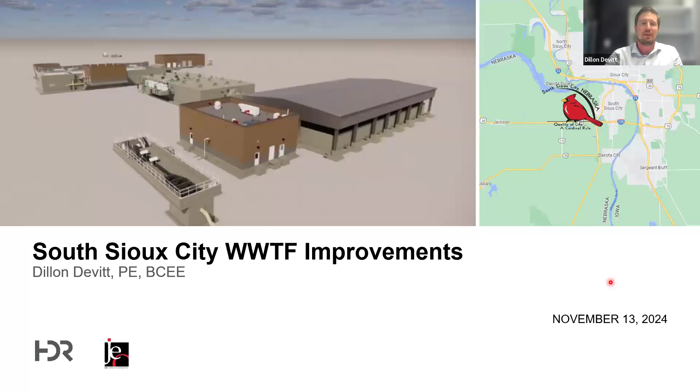So again, starting with our background of the facility, talk about why this project was needed, what we were looking for, the outcomes and the objectives, and then kind of dig into some of the details about the design and quite a bit on the challenges we had during the startup.

So starting on the background: South Sioux City, Nebraska is a town located in the northeast section of Nebraska. It's a suburb of the Sioux City metropolitan area. It is just on the south side of the Missouri River, and has a metro population of just south of 200,000 at the moment. Like Dan had mentioned, this project won a grand prize award in the industrial waste category. So keep in mind that this whole system was designed to treat, at the moment, 100% industrial waste flows. So even though it's a city project, it is an industrial treatment system.

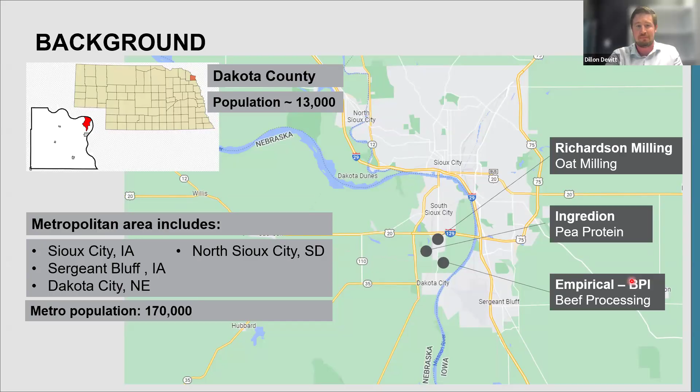About 5 years ago, the conditions of the South Sioux City wastewater treatment facility were as follows: there is an industrial district in South Sioux City that houses a handful of industries. The primary industries were BPI, a meat processor, Richardson Milling, which does oat processing, and an Ingredion facility that did pea protein.

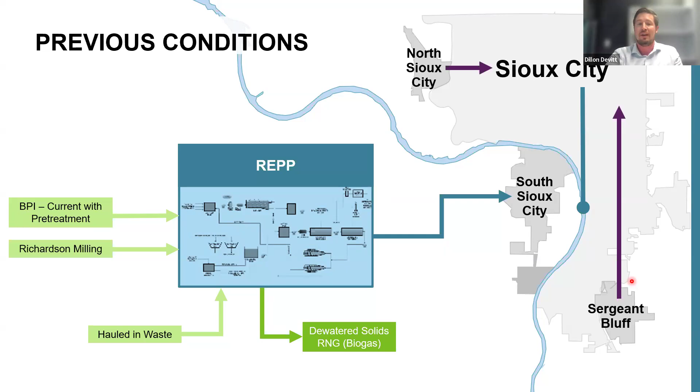There was a for-profit facility we refer to as REPP, which stands for Renewable Energy Production. They would take all the waste generated from the industries and run it through anaerobic treatment to produce biogas, which they would clean into a renewable natural gas source and inject into the city's grid. That REPP facility ended up having financial troubles and went under.

So there was a point in time where all this high strength industrial wastewater was no longer able to be pre-treated in this renewable energy plant. So all that wastewater, along with South Sioux City's domestic wastewater, would be collected in their sanitary sewer system.

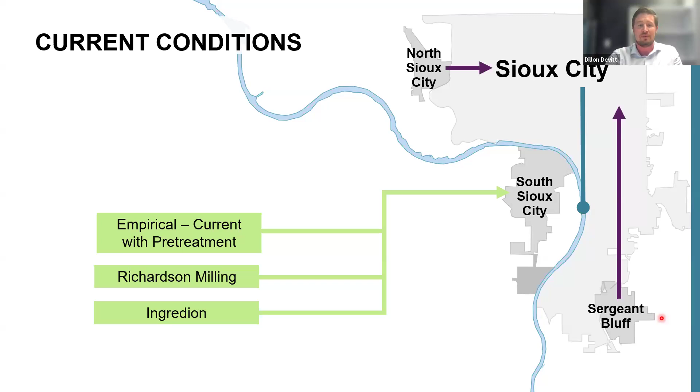They would pump it across or under the river to the Sioux City, Iowa wastewater treatment plant. That ended up causing a lot of strain without the pretreatment facility for the South Sioux City industries. So South Sioux City reached out, they had a problem, and they sent out an RFP.

We started talking to them, HDR did, and ultimately we started planning on what we could do to fix this problem.

The project needs for the RFP that we wanted to look at was, of course, that the pretreatment facility was out of operation. Because there was no pretreatment from this high industrial strength waste, Sioux City, Iowa was putting capacity restrictions on the South Sioux City wastewater coming across the river.

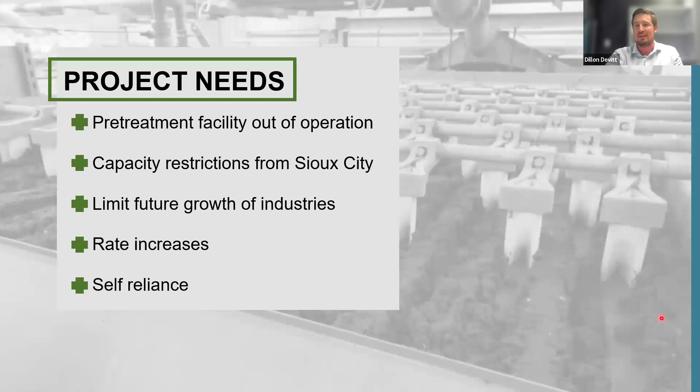Those restrictions limited any future growth of industries in the South Sioux City industrial district. And there was threats of rate increases, and ultimately the city decided they wanted to become self-reliant.

So they identified some objectives. They wanted to figure out how to develop the most cost-effective solution for the industries, to maintain the ability to grow the industrial area and maintain user rates on the industries as low as they possibly could.

They wanted to utilize the existing infrastructure. And because it was an industrial district, a big topic was that if a new industry came in, we needed to be able to expand it fairly easily. And then, of course, we wanted to be energy efficient.

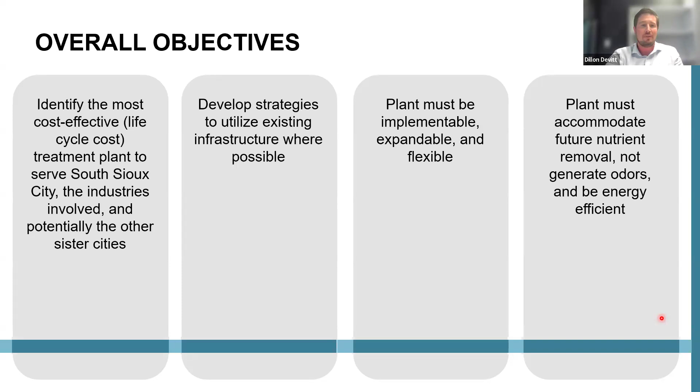We didn't want to be a nuisance to neighbors. We didn't want to generate odors. And if they were ever imposed nutrient limits, we wanted to be able to handle that. So we jumped into doing a feasibility study.

A little bit of information about the wastewater flow being treated at the South Sioux City wastewater treatment plant right now: we treat around 2.3 million gallons per day at a max month, around 2.

For those who have a feel for BOD in wastewater, typical domestic strength BOD, the stuff that comes out of city sewers, is around 300 milligrams per liter. BOD is a measure of how much carbon is in the wastewater. Our wastewater was more than 10 times that, so it's very high strength wastewater.

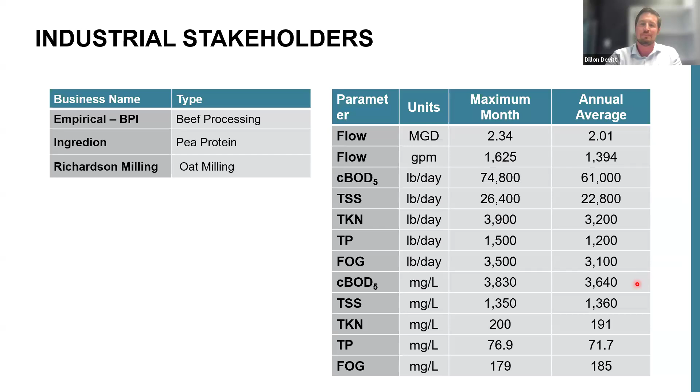Knowing that, we set out and did a feasibility study and looked at a handful of alternatives. We ended up boiling those alternatives down to three main alternatives that we compared more rigorously.

We had conventional activated sludge, aerobic granular sludge, and we also compared it against membrane bioreactors. In every alternative we looked at, anaerobic pre-treatment was a must because of the strength of the wastewater. At the end of the feasibility study, the most cost-effective option monetarily was the aerobic granular sludge.

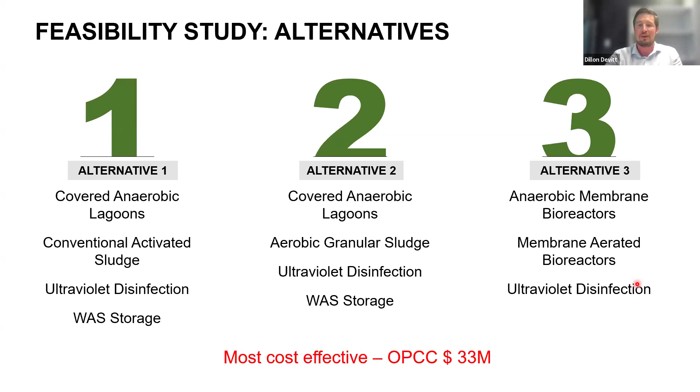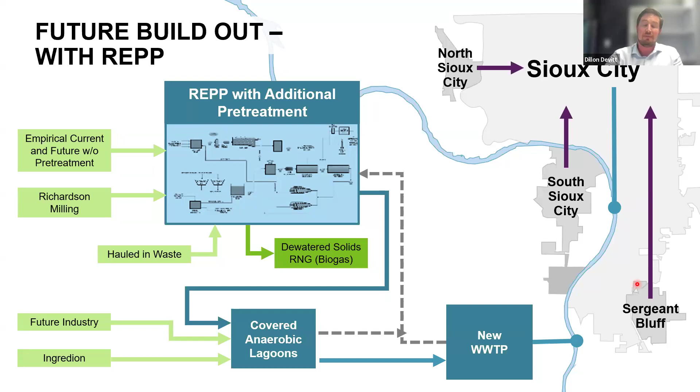A couple of things we were looking at for the flexibility needs of this system: we needed to plan for the ability for the REPP pretreatment facility to come back online. So we needed to see what would happen to the plant if our wastewater strength decreased. We also needed to plan for that never coming back online.

So why we ended up with our anaerobic treatment process of lagoons is that it gave us the flexibility of treating lower strength or higher strength wastewater, with the ability for flow equalization, as these industries don't operate 24/7. Many of these industries operate 5 days a week, sometimes 6 days a week.

So there are days where no flow comes to the plant from the industries. Those covered anaerobic lagoons were able to still have flow coming out of them to sustain the secondary biological process when no flow was coming in for a period of 2 to 3 days.

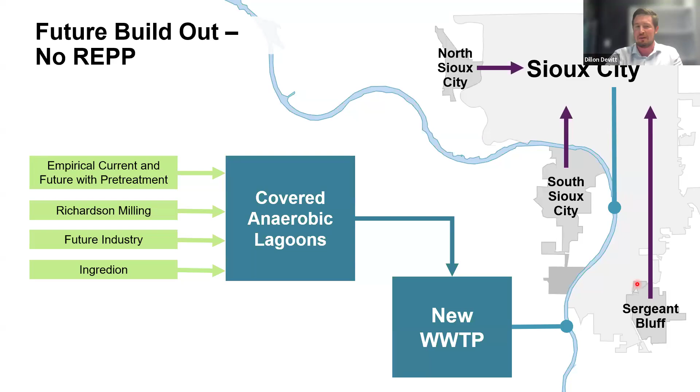We ended up picking AGS, aerobic granular sludge, for this facility. I'll be saying AGS for most of this presentation. It was a new greenfield plant, so the city had to buy land, and the AGS system has a very small footprint, which was very appealing. Because of that small footprint and its mechanical aspects, it had lower life cycle costs and was more energy efficient. The anaerobic lagoons provided flow and load equalization upstream, which helps by limiting typical peak flows and maximum instantaneous flow rates seen in domestic systems without equalization.

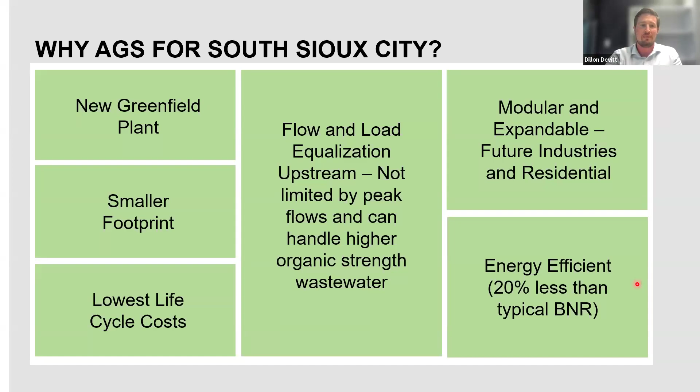So real quick, I want to take a step back from the project itself and do a little dive into the AGS overview.

AGS, or aerobic granular sludge, is a fairly new wastewater treatment system for the industry. It's classified as an intensified activated sludge, meaning you're getting more bacteria or biomass in the same volume of a treatment system. The AGS system accomplishes that by growing aerobic granules, which have a couple of benefits. You can fit more of them in the same volume compared to a conventional sludge system, and they can grow 2 to 5 millimeters in diameter, looking like little peas, and they settle very fast.

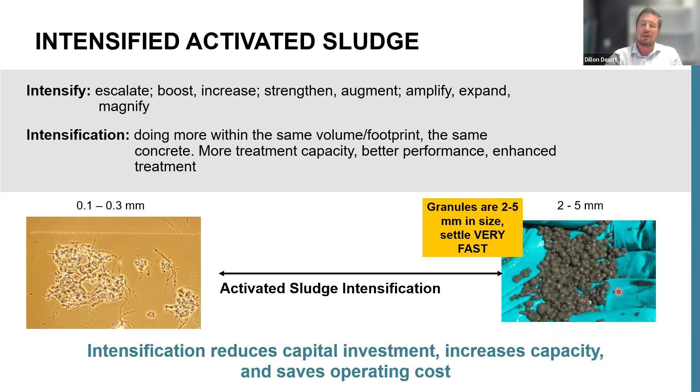A big part of wastewater treatment is separating solids from liquid, and with aerobic granules that's much easier. You have an outer zone that's aerobic, an inner subsection that's anoxic, and a center zone that's anaerobic. That biological population basically replaces the need for those separate tanks. Here's a good video with an overview of it.

The theory behind the aerobic granules is that they are layered. In a conventional activated sludge system, we have separate zones of aerobic, anoxic, and anaerobic systems, each treating a different constituent in the wastewater. With aerobic granular sludge, those zones are all within each granule. As you can see in that animation, the spheres have layers with anaerobic in the middle, anoxic in the subsection, and aerobic around the outside. They settle very fast, as you can tell from that picture in the corner of the screen.

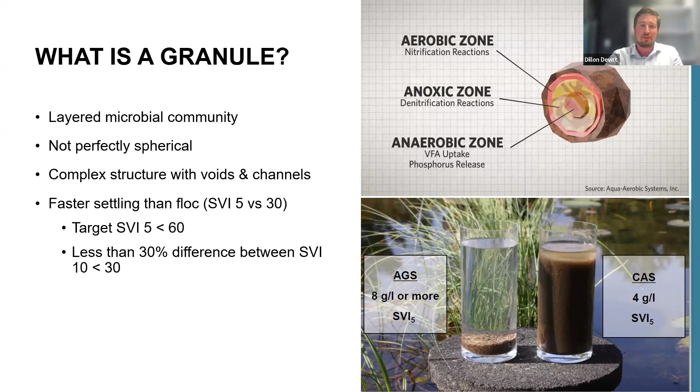So how do we form the granules? With the AGS system, we have two primary methods: hydraulic selection and biological selection. Having a system that selects for PAOs, which happens during anaerobic fill cycles, helps grow EPS, an extracellular polymer that helps bind the granules together. Once we grow them, we keep them in the tank by settling them to the bottom and wasting the lighter floc from further up.

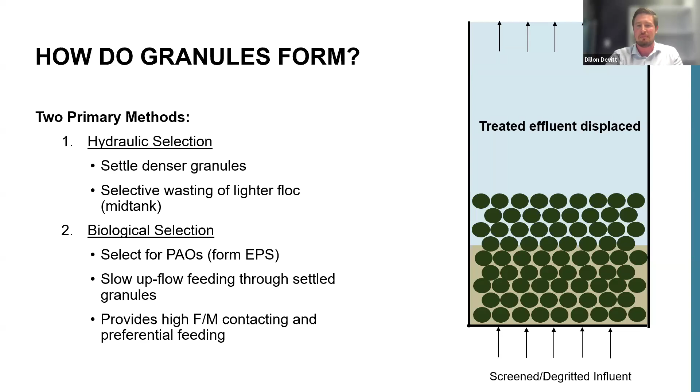The system works similar to a sequencing batch reactor, or SBR, so it goes in cycles: it fills, it aerates, it settles, and it wastes.

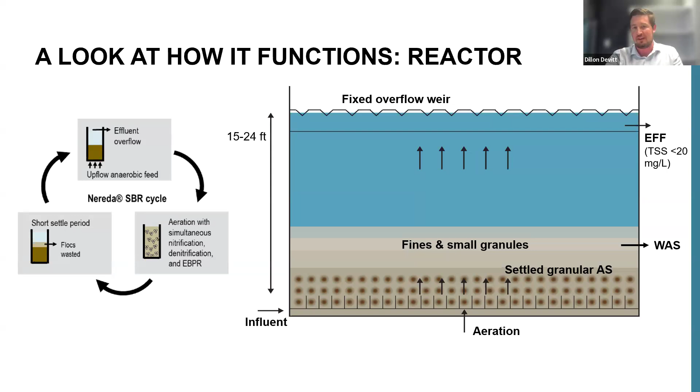So I wanted to jump into a little bit of the design of the plant, getting back to the storyline of the South Sioux City system. Once we finished the feasibility study and selected a treatment technology, we worked with the state of Nebraska and determined effluent limits. This plant discharges into the Missouri River, so we had fairly less stringent effluent requirements than you see in some places. We had a 25 milligram per liter BOD effluent target, a 30 milligram per liter suspended solids target, and some fairly high ammonia targets, even though we had very high ammonia coming into the plant.

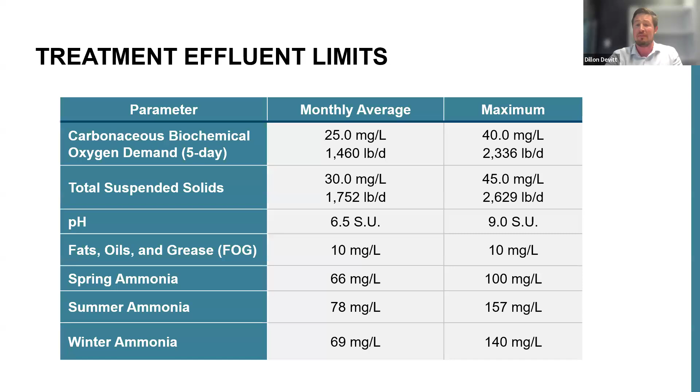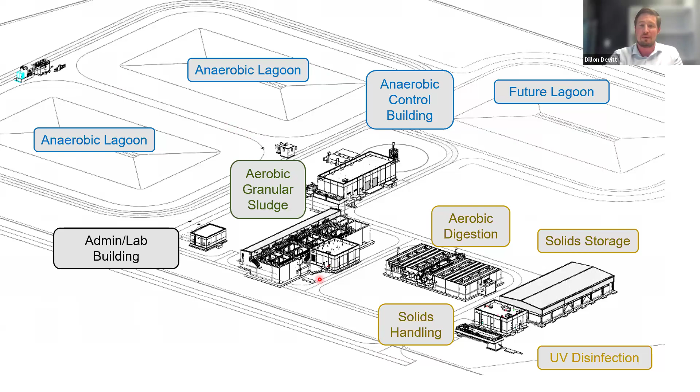We went through a design process over about 1.5 years and ended up with a site layout like this. Starting in the top corner, we had our anaerobic lagoons, which allowed for the first anaerobic pre-treatment of the high-strength wastewater along with flow equalization for the entire downstream process. That pre-treated wastewater would go into our aerobic granular sludge system and ultimately out to UV disinfection. We had auxiliary processes to handle biogas generated in the anaerobic lagoon system and the waste activated solids generated in the aerobic granular sludge system.

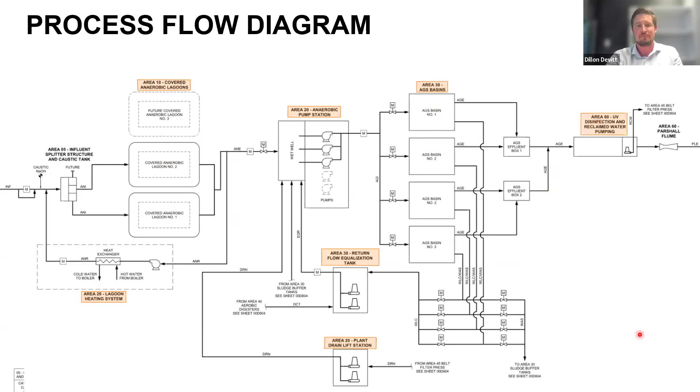During our design process, we modeled every single building constructed out on the plant, so we were able to detail out everything we wanted shown in a 3D model and render those models to show to the city, contractors, and other stakeholders.

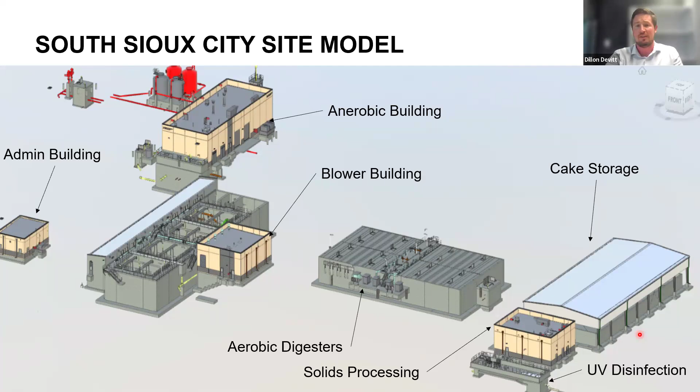Zooming into the AGS reactors in particular, we have 4 AGS reactors. These reactors operate in sequence, so one reactor is always filling at a time. There is no need to stop flow.

The reactors fill, and as one is filling, the other 3 reactors are in either a react cycle, a settle cycle, or a wasting cycle. There are effluent weirs inside the tanks, and when wastewater comes into the reactors, it pushes the clean treated water out.

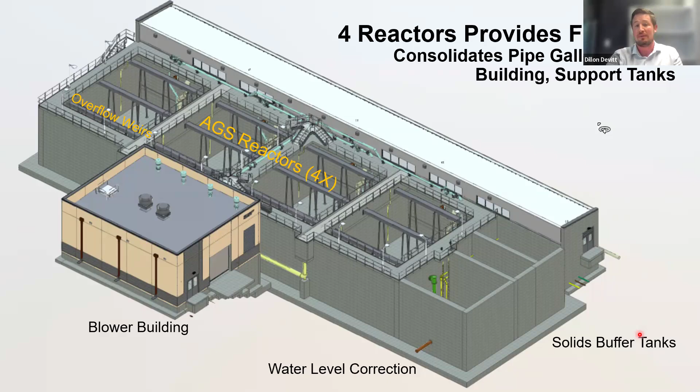So jumping over a little bit to some of the struggles we had during bidding and market - this is right in the middle of our COVID supply chain issues, so this was a huge struggle we had to overcome. We had an engineer's estimate of constructing this entire facility of around 33 million.

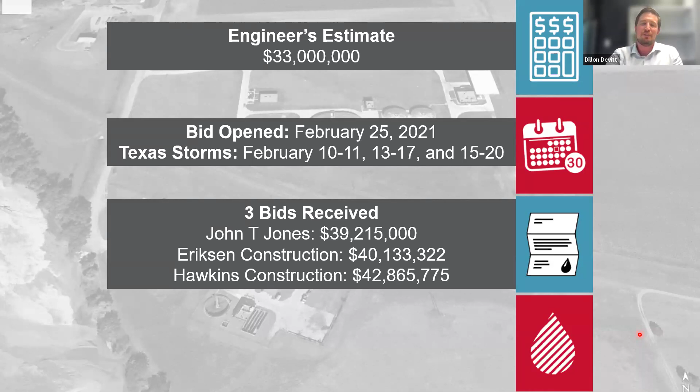And in 2021, we also had Texas storms, plus COVID supply chain issues, so we had bids come in very high. Bids opened February of 2021. We had COVID, the supply chain issues, and all suppliers had very low hold times on their quotes.

We had to go immediately to a value engineering effort to make this plant feasible for funding. We were able to remove about $1 million from the project through a VE effort. We were able to acquire some additional SRF loan money, and we talked to a contractor to get them on board with the unknowns that were going to happen in the future.

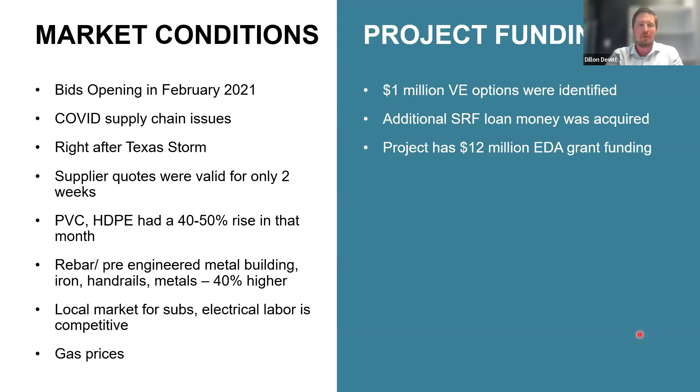It was a really, I wouldn't say difficult, but nail-biting time on whether this was going to happen or not. But thankfully, we were able to figure out a path forward.

Once we figured out a path forward, we received bids in February 2021, gave a notice of award in April, and construction commenced. We ended up completing construction in June 2023, and opened the influent valve to the plant in July 2023.

This plant has been in operation since July of last year, and we were able to go through startup. I'll talk about it here in a little bit, but there's also a bit of an expansion to the plant in the future.

So I have some photos I wanted to share of this system. I like this photo because it kind of shows the size comparison - we have 25 million gallons of anaerobic lagoon capacity.

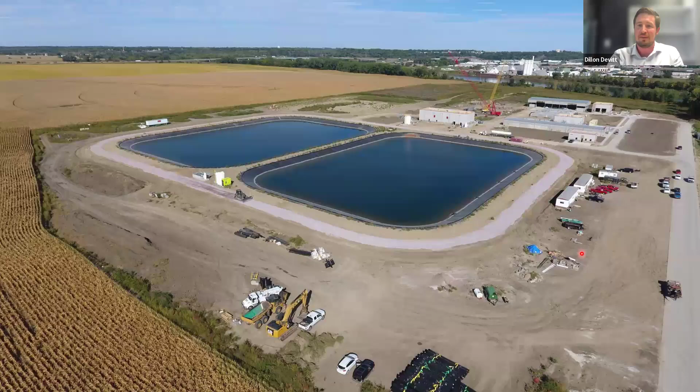This photo is right before the covers were put on the lagoon, so they are full of groundwater for leak testing. Flying over to the north side of the plant, you can see the lagoons here, showing the size comparison between anaerobic lagoons versus the AGS system.

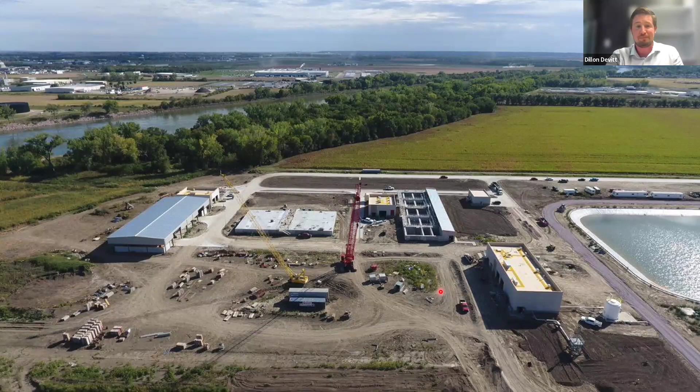The AGS system is much more compact and much smaller, obviously. Just another photo from the other angle.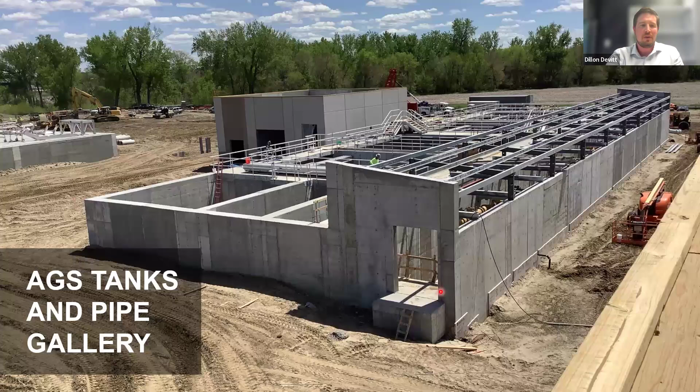The AGS system in construction - we have the 4 tanks, and then there is an auxiliary pipe gallery off to the side of the tanks that holds all the piping that sends wastewater to and from each one of the tanks.

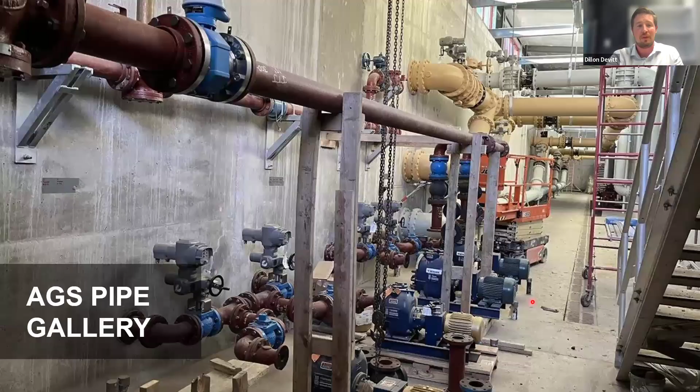Inside that pipe gallery, there is quite a bit of piping that goes back and forth. We were able to size it fairly decently to allow access for maintenance of all valves, equipment, and so on.

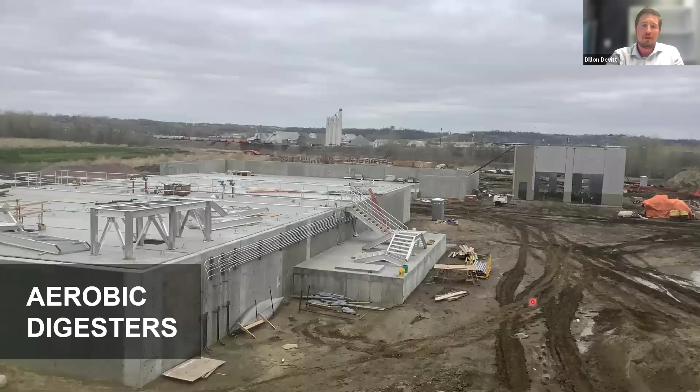We were able to put aerobic digesters in to the south of the plant. These aerobic digesters treat our biosolids generated in the AGS plant, targeting a Class B biosolids. The city ultimately dewaters their treated biosolids, stores them in a storage pad until the months of the year when they're able to land apply them.

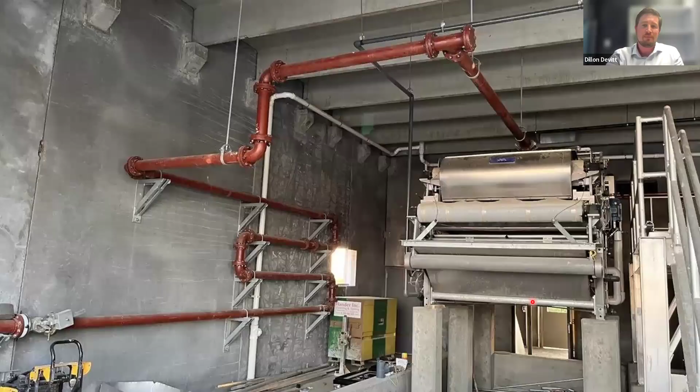Dewatering with a belt filter press - just a construction photo of it.

Construction was complete around May of 2023, and we started planning to start up the facility. I want to talk about the startup challenges we had during that time.

We were able to start the facility up in June 2023. We seeded the lagoons and the AGS seeding from an anaerobic system across the river from Sioux City, Iowa. We took some of their waste solids, brought them over, and put them in our anaerobic system. We had a neighboring aerobic industrial facility that gave us their waste activated solids, which we used to seed the aerobic granular sludge system. Once we had seeded everything within about a 2-week period, we opened the influent valve and started pumping raw wastewater into the facility on June 12th, 2023.

If you remember from that photo I showed earlier, those lagoons were full of groundwater - we had filled them up to leak test the liner. Once we started sending raw wastewater into them, it took a while to turn that over. We get about 2 million gallons a day of raw wastewater, and we had 25 million gallons of groundwater inside that anaerobic system that just had to flush out. Around mid-August, that anaerobic system was able to generate biogas.

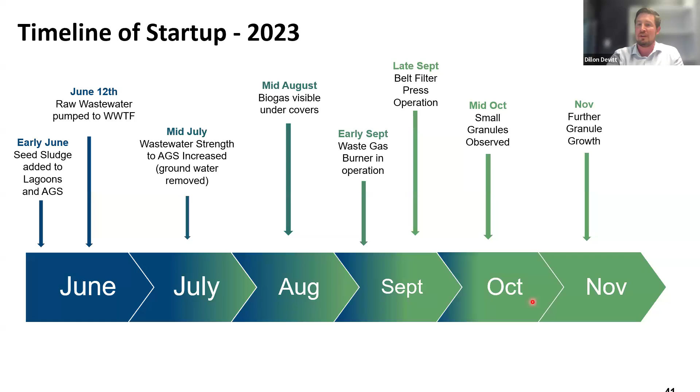Based on that timeline, the first thing we did was seed our lagoons. We had a very large volume anaerobic system, and we seeded about 20,000 gallons of sludge - not even 1% of the volume. It was almost an inoculant to kickstart the process, as opposed to fully maintaining a whole biomass in the system. We just had trucks come over filled with that seed sludge, and they ran back and forth for about a week seeding the plant.

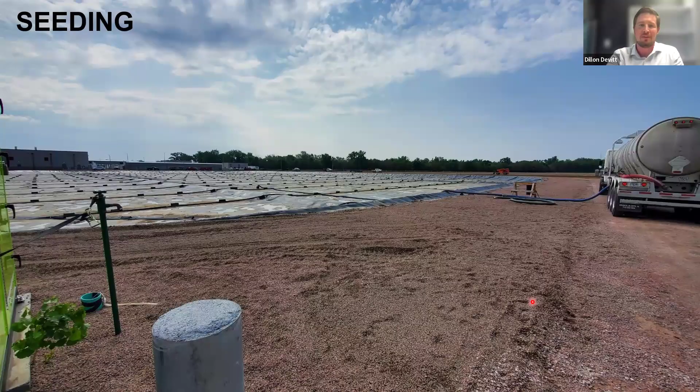Once we opened up the raw wastewater valve, we started to monitor the operation of the system. The covered anaerobic lagoons run very similar to any other anaerobic process, other than the solids concentration inside them. We monitor alkalinity values, volatile acids production, pH, BOD, and COD removals.

One topic that was important during design and became much more important during startup was sulfates. We wanted to monitor the sulfates because the anaerobic system produces biogas that we were ultimately planning to burn in boilers to heat the process, and burning biogas with hydrogen sulfide in it is detrimental to equipment.

Quaternary ammonium compounds are an inhibitory compound that inhibits biological growth in different types of anaerobic bacteria, so we wanted to monitor that too. We did measure some, but it didn't impact the process.

The AGS system was monitored very similar to any other aerobic system, with the caveat of the batch style. So we monitored CODs, mixed liquors, TKNs, ammonias, and worked with Aqua Aerobics, who was the supplier, on settle time and cycle structure.

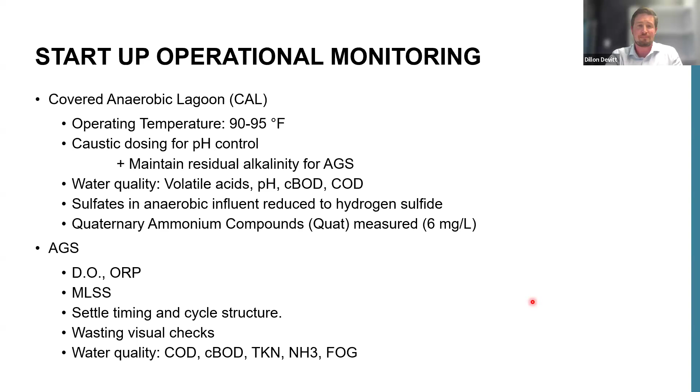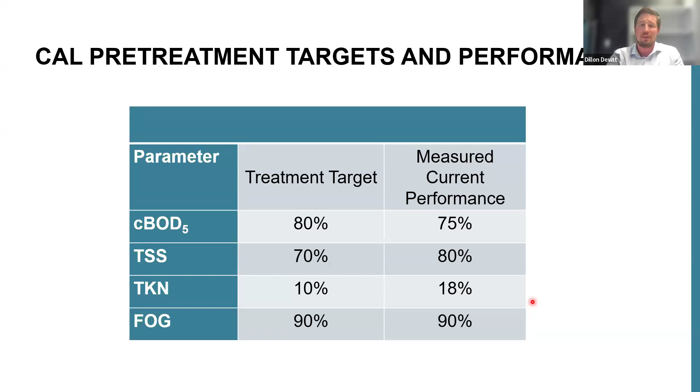During startup, the first process to start up was the covered anaerobic lagoons. We had treatment targets of 80% BOD removal, 70% TSS, 10% TKN, and 90% fats, oils, and greases removal. If you see the right column, we pretty much hit all of our targets for each of our main constituents.

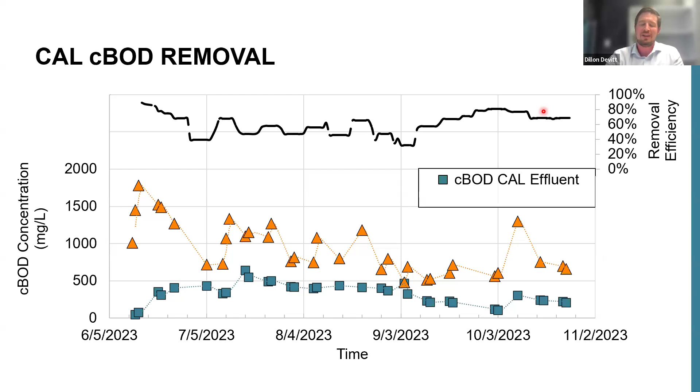That's kind of a neat graph - I think it shows a bit of a story on how fast the biomass grew. But in terms of how long it took to pass all that groundwater out of the system, I think this next one tells it a little better.

This is the ammonia readings we recorded coming out of that anaerobic system. You can tell it's a fairly nice curved line showing how long it took to almost purge the system of all the groundwater. It took about 5 months, and past this point we stay fairly steady on how much ammonia is coming out of the lagoons.

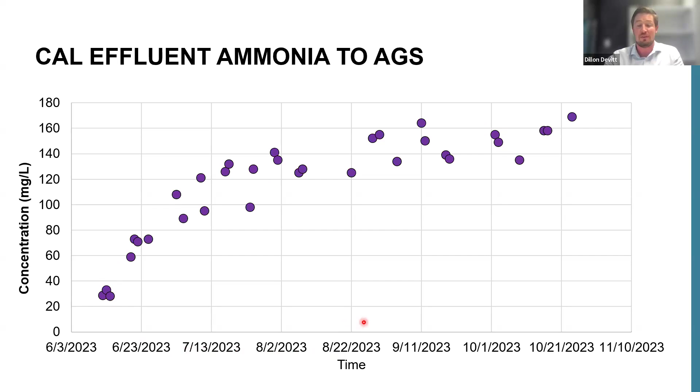So I guess I'll flip right back. So this is kind of the timeline down here of how long it took to purge the system, and that's with the water quality.

September 5th, we finally saw that the system had grown enough and was operating efficiently enough that biogas was being generated. So we started seeing biogas filling up the lagoons. The lagoons are covered anaerobic lagoons, and when the biogas is generated in the lagoon, it just collects in bags or a cover on top. As you can tell, that looks pretty ballooned up, and that underneath that cover is all biogas.

So once we saw the biogas, we started up our biogas handling system. And then I mentioned it a little bit before, but I want to dig into it a little bit more. We realized very quickly that we had a sulfur problem.

Our original design for the system had about a 460 continuously generated SCFM biogas flow rate. So we thought we were going to generate 460 SCFM. We thought we were going to have somewhere around 3,000 parts per million by volume of hydrogen sulfide in our biogas. And we had installed a proprietary activated carbon scrubbing vessel that we were planning to take the biogas, send it through the scrubbing vessel that would absorb the hydrogen sulfide. After that vessel, we were able to use that biogas for beneficial use, or at that point in time, burn it in a waste gas burner.

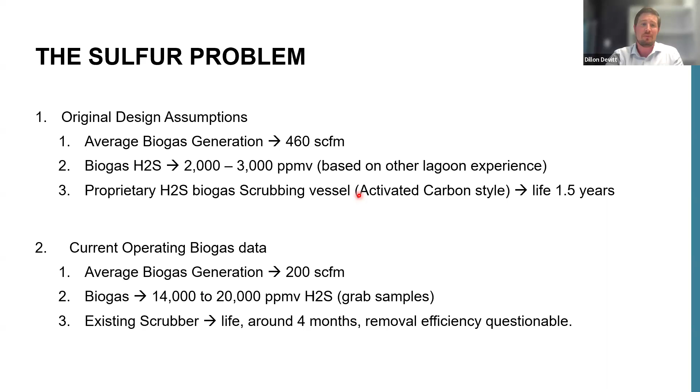So we started asking, where's the sulfur coming from? We designed this plant knowing that we had a background sulfur concentration that came from the drinking water supply in the area, of around 220 milligrams per liter of sulfate. And we knew that the industries were protein-based industries, and protein has a sulfur component to it that was going to break down in our anaerobic system and ultimately be reduced to hydrogen sulfide.

We started to evaluate where the sulfur was coming from, and we ended up finding out that with the new wastewater treatment facility, we had imposed a little bit more stringent fats, oils, and grease limits coming into our influent, and the industries in response had increased their sulfuric acid usage in their fats, oils, and grease removal systems by quite a bit. Because we had issued a lower influent limit for the pre-treatment agreements to the industries, their response was to dose everything with sulfuric acid.

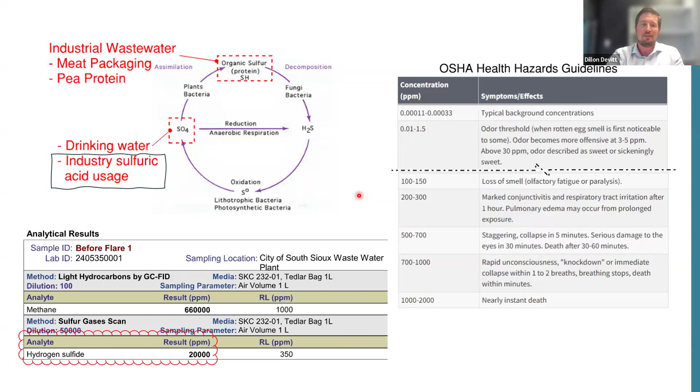So a couple of pieces of info on here on why this was such a problem. As you can tell in that bottom left-hand corner, there's a lab result that we had at 20,000. And the OSHA health and safety guidelines are over there on the right, which at 2,000, OSHA lists it as almost nearly instant death if you were to take a full breath of it. So we were not only trying to figure it out on a cost perspective, but it was a huge health and safety issue.

So we dug into what we can do to fix this issue. Our first course of action was source control. We talked to the industries, we figured out why they were adding the acid, and we did do a couple of pilot tests with industries trying to reduce their sulfuric acid and see the impacts on their wastewater.

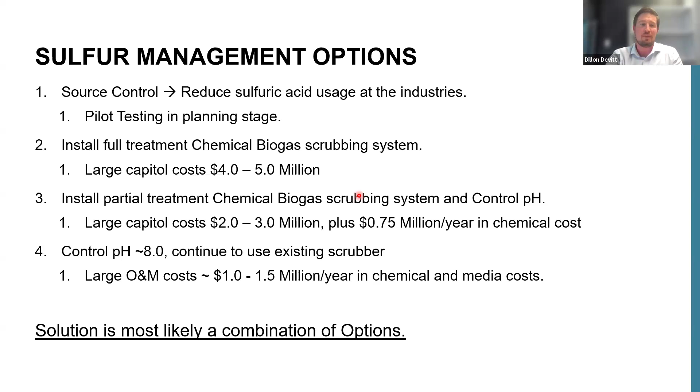We did a pseudo feasibility study on different systems to try to figure out what the best path forward would be, and ultimately looked at chemical systems and other media systems. We did end up choosing a chemical biogas scrubbing system for the very high concentration. It was the most cost-effective solution from an O&M maintenance standpoint. We also are still working with the industries to reduce their sulfur injection into the system.

So once we had started up the lagoons, we started up the biogas system and troubleshooted our sulfur in the biogas and had a path forward. We then transitioned over to looking at the aerobic granular sludge system.

Our aerobic granular sludge system was designed for up to 8,000 milligrams per liter mixed liquor suspended solids concentration. We were running at about half of that, and we also had about half the organic strength coming in, so it balanced out pretty well. Our operating cycles were right about where we designed them, with 1.5 hour fills and 3.5 hour react cycles. We also had very high temperatures, since all the wastewater coming into our secondary treatment system was from an anaerobic process maintained at 83 to 93 degrees. We also went back and forth a few times playing with ammonia-based aeration control and dissolved oxygen control.

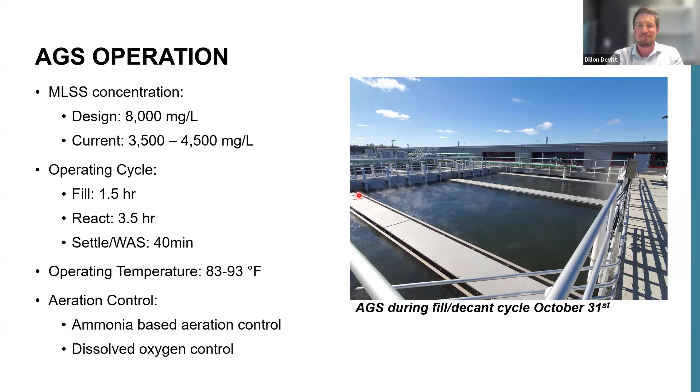This is an interesting graph because it shows the startup challenges we had during startup of the AGS process. It shows what's coming out of the AGS system in terms of BOD, TSS, and ammonia. Right at the beginning, we had fairly weak strength wastewater coming out of the lagoons, since we were flushing out the groundwater. Then once that wastewater started to get a higher strength, we had a very poor settling situation occur.

That poor settling situation occurred, and everyone scrambled trying to figure out what was going on. We ultimately identified it as a very large filamentous bacteria spike. For those who know a little about filaments in wastewater, most bacteria settles fairly well. But if you get a filamentous surge, the filaments look like spaghetti, and spaghetti doesn't settle very well.

We had a filamentous surge that passed within about a month period, and we thought we were back in the clear. Then we found out we had a mechanical failure where an air purge line had started dumping air into the tank while it was settling. We identified that issue and got it fixed, and again we thought we were in the clear. Then, another month and a half later, we had a programming error on our solids handling system, which recycled a lot of solids back to our AGS system, spiking us up yet again.

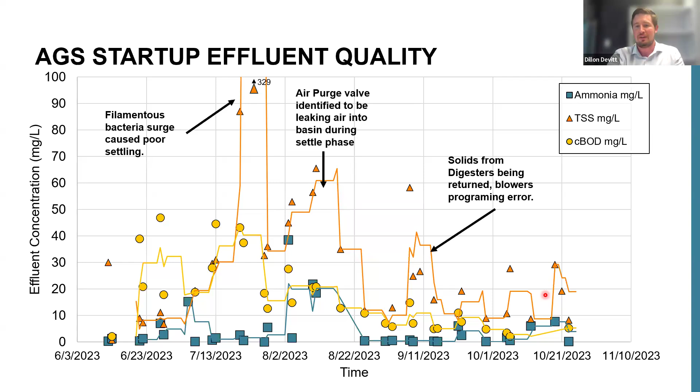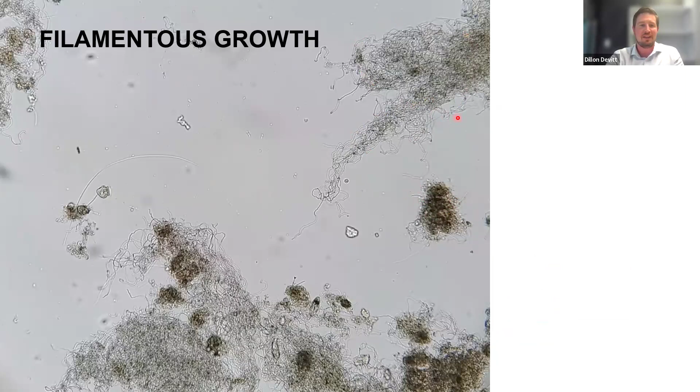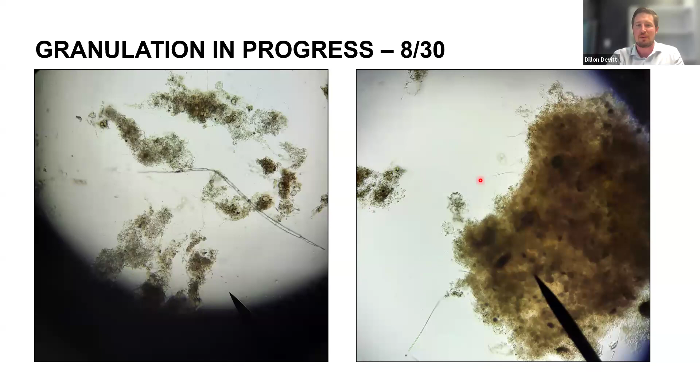So I've got a slide here showing the filamentous growth. As you can tell, under a microscope you should see much more floc and almost none of this filamentous material. This is a very poorly settling mixed liquor, but it did pass quickly. This is what it should look like, and this is what it did look like a couple months later - our mixed liquor floc, which we attributed at that time as the start of our granulation process in the AGS system.

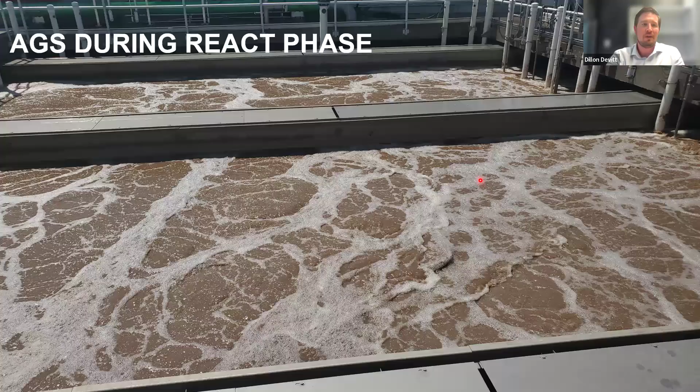We've got a photo here showing the AGS system during the react phase. As you can tell, there's a lot of solids in the system, and that looks quite different from the settle phase. So this system has worked pretty well at separating all these solids given the industrial waste stream.

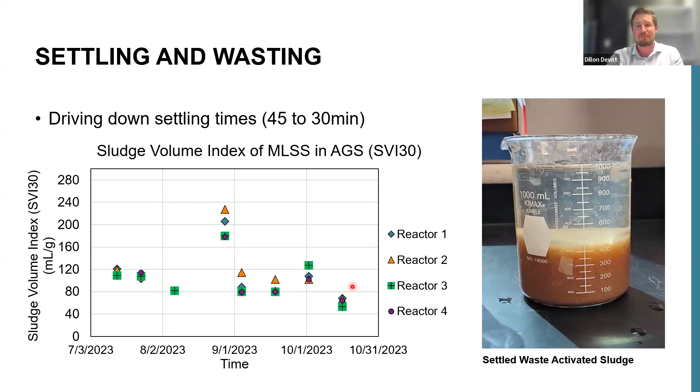And then by the end of startup, we were able to measure granule growth. So this one's kind of interesting, and it's a little bit different than what you see in a conventional system.

The way Aqua-Aerobics measures granule growth is they do a sieve test, and the sieves are very similar to sieves you would use to sieve out gravel. You filter the mixed liquor through these sieves, and they have different size holes, which catch the granules so you can measure if they are 0.212 millimeter, 0.425 millimeter, or anything below 0.212 millimeter, where it's classified as a non-granule.

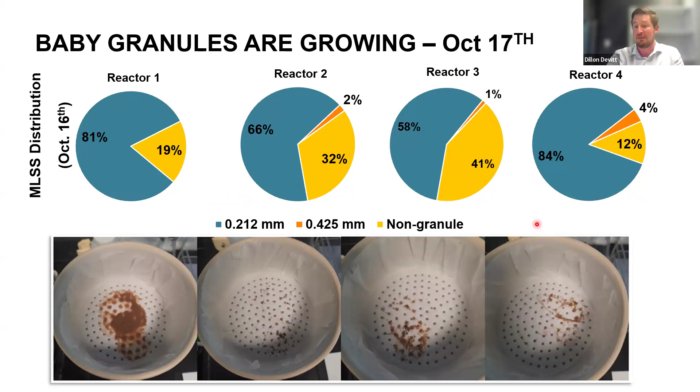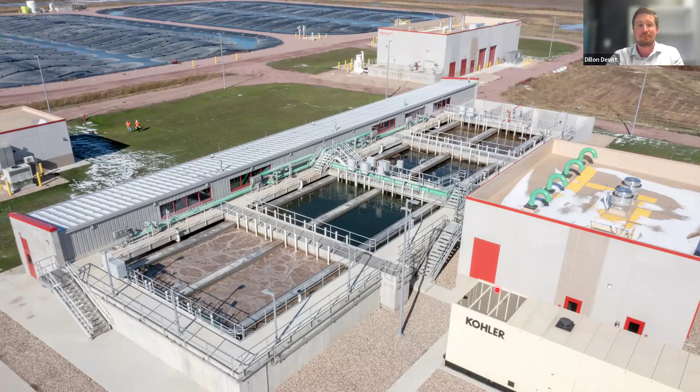So we passed startup. We are continually monitoring the operation of this plant, and we've identified a handful of different issues that have either been fixed with an operational change or identified as needing some kind of infrastructure update in order to make the plant run more efficiently.

Sorry, I think I missed a slide. But...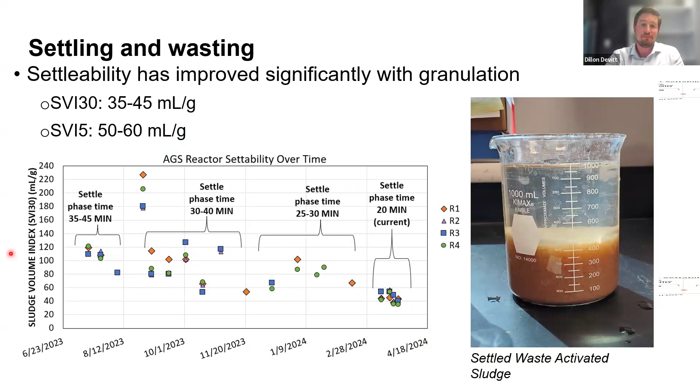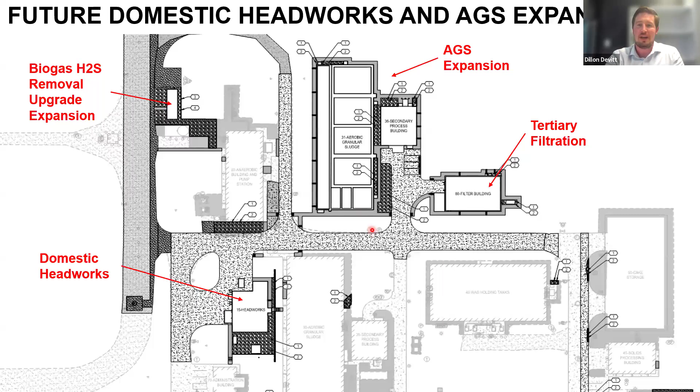So with that, that is all I have on the South Sioux City story. Open it up to Dan or questions.

Thank you so much, Dillon. Appreciate that. Maybe we'll pull down the slide deck so people will be able to see our smiling faces here. We can chat some. That was a fantastic presentation, my friend. I really appreciate that, that was awesome, that was just really great. Now we've got some questions that came in the chat.

I put those together, and maybe I'll go through and hit the different points at a high level, and then we'll come back and pick them off a little bit. So a little bit in the background space.

First of all, we do want to hear you say South Sioux City five times really fast. But no, seriously, in the background, right?

One of the early questions is, did that REPP facility already have its own NPDES permit? How did that fit in? And then why didn't the city just simply take over that existing facility and burn off the gas if they didn't want to sell it to somebody? So that's one of the early questions, just to understand a little bit about the situation that you inherited.

In terms of some of the design choices, you had this very high strength wastewater, very strong carbonaceous BOD 5-day. You talked about the anaerobic lagoon pretreatment. We had some questions about why that design decision. I know you talked about flow, planning, and strength, but if we can unpack that a little bit. And some folks were wondering, why not consider anaerobic upflow biofilm reactors? So maybe that's a question we'll touch on in those design choices.